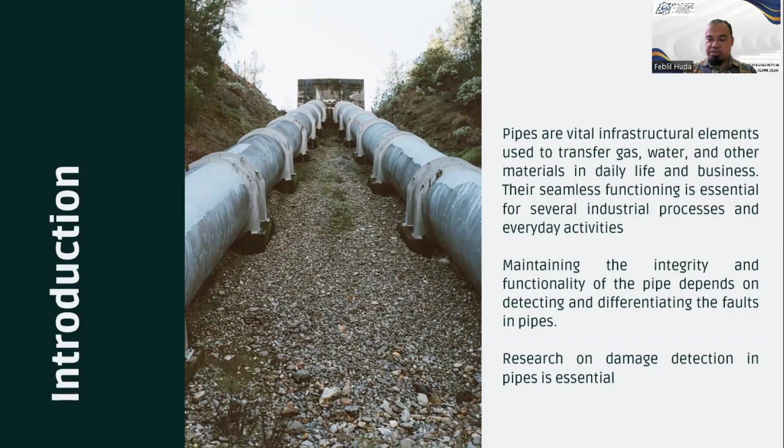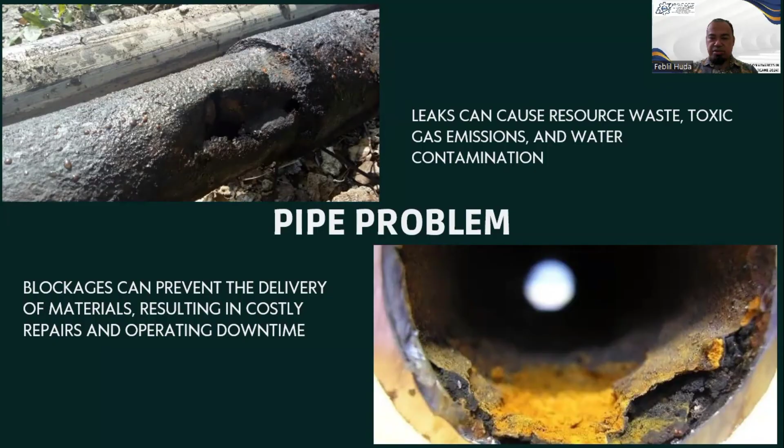There are two types of damage frequently found in pipelines. The first one is leakage and the second one is blockage. Leaks can cause resource waste, toxic gas emission, and water contamination, and blockage can prevent the delivery of materials, resulting in costly repairs and operating downtime. These two types of damage will be investigated in this research.

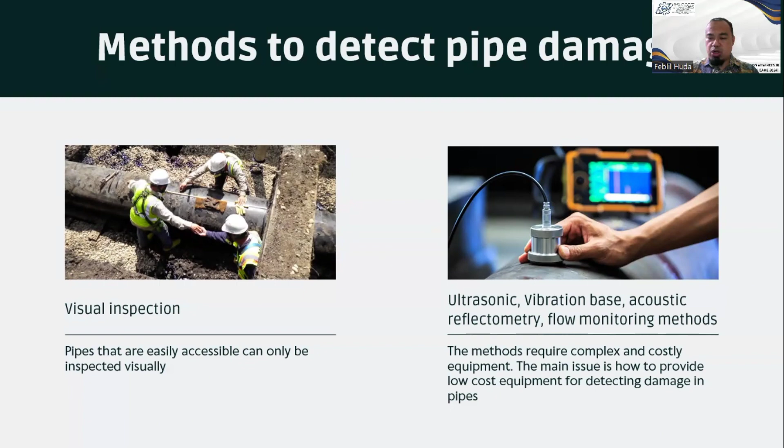Because of the importance of damage detection in pipe, several methods have been investigated. The very basic method is visual inspection, but this method has the weakness that only pipes that are easily accessible can be inspected visually. The other methods are ultrasonic, vibration-based, acoustic reflectometry, and flow monitoring. These methods require complex and costly equipment. So the main issue is how to provide low-cost equipment for detecting damage in pipe.

The sound signal or acoustic reflectometry method presents some benefits for pipeline damage identification. This technique sends acoustic pulses into the pipeline and analyzes the return signal to discover obstructions, leaks, and other irregularities. Real-time monitoring, which enables issue identification and localization without requiring significant excavation or physical access to the entire pipeline, is one of its main advantages.

So in this research, the sound signal or acoustic reflectometry will be used to investigate damage in pipeline. By using a low-cost microphone, we will investigate whether this method can detect the damage in pipeline accurately.

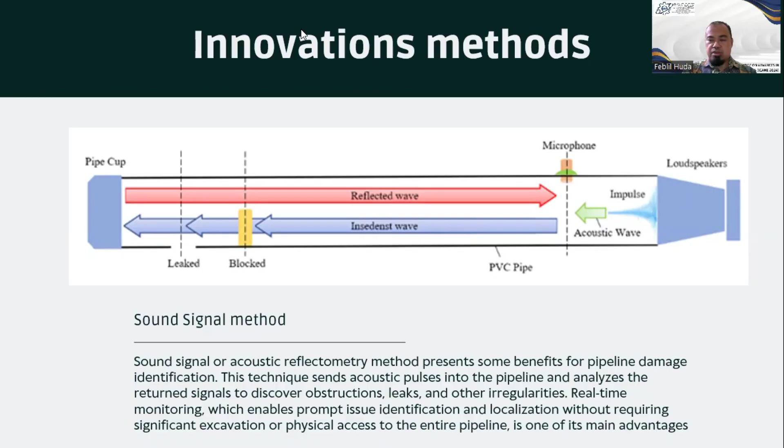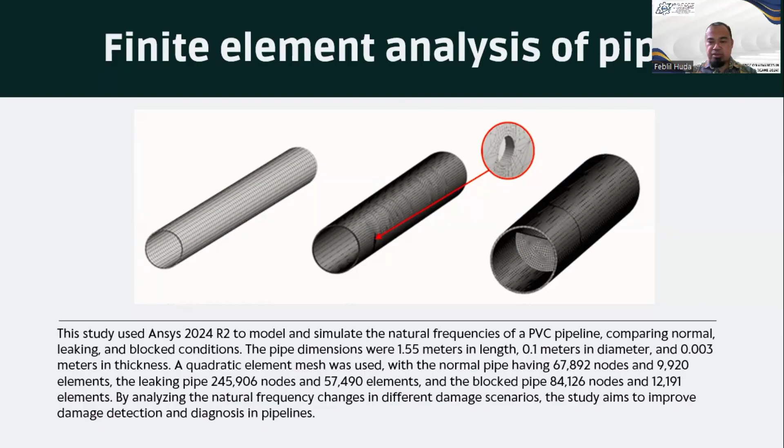The research method. At the first stage, we conduct finite element analysis of pipes. The study used ANSYS 2024 R2 to model and simulate the natural frequencies of a PVC pipeline, comparing normal, leaking, and blocked conditions. And here are some data of the pipe. By analyzing the natural frequency changes in different damage scenarios, we will find the difference between normal, leaking, and blocked conditions. And here is the experimental setup.

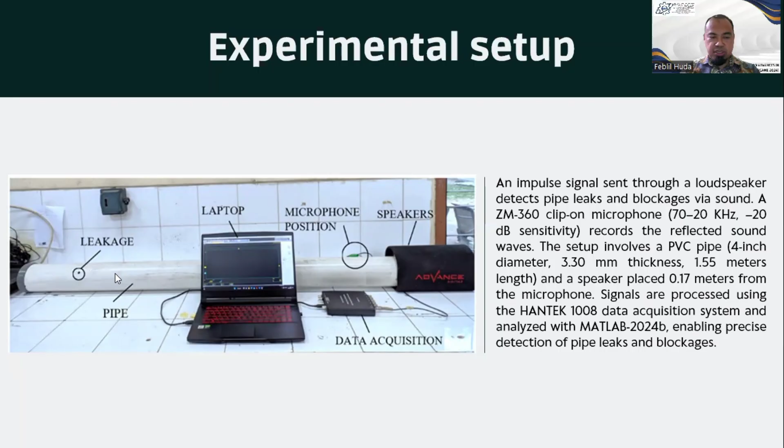The speaker will give an impulse into the pipe, and here is the simple microphone position. We install it in the pipe, then the microphone is connected to data acquisition, and data acquisition is connected to the computer. And we give some leakage and blockage in the pipe. The artificial failure condition is given to the pipe.

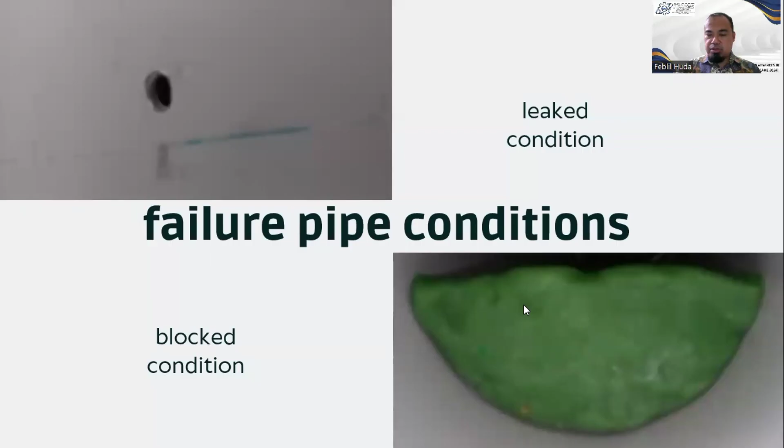The first form of damage in pipe is the leak condition. In leak condition, we make holes at some positions in the pipe, and for the blockage condition, we put some plasticine in the pipe.

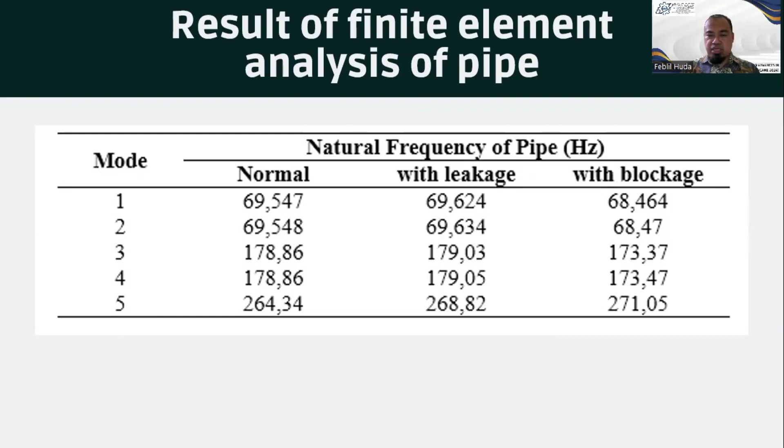Result and discussions. Here is the result of finite element analysis of pipe. We can see here the comparison between natural frequency of pipe between normal and with leakage and blockage, with data from the first mode until the fifth mode. We can see that by giving the leakage, the natural frequency of pipe is changed, and also with the blockage. So the damage will change the dynamic properties of the pipe.

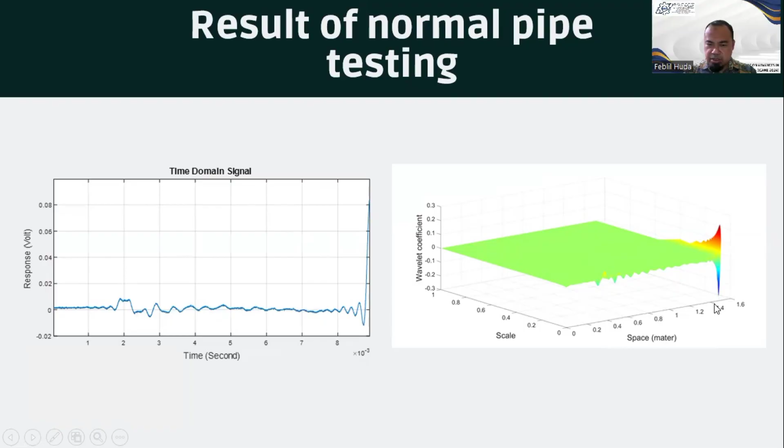At the end of the pipe, this is the cap of the pipe, and this is the result of normal pipe testing. We can see here the time domain signal; position 0 is the position of the microphone, and the end of this data is the position of the cap of the pipe. For normal condition we can see just a little bit of curve here, and when we use wavelet transformation, we can look up to the position. At that position, the wavelet coefficient is higher than the others.

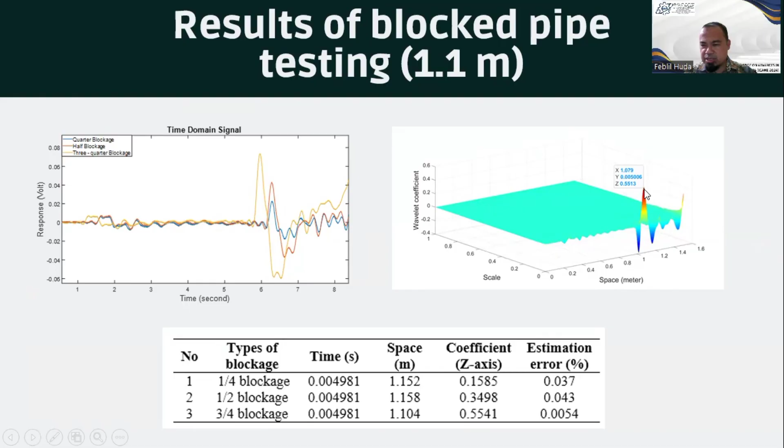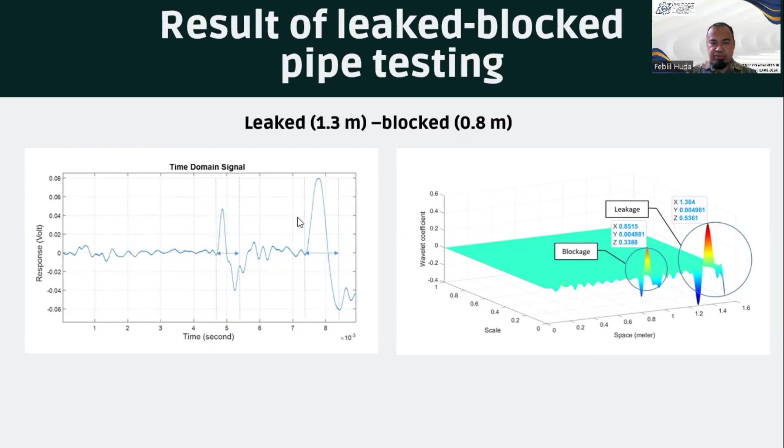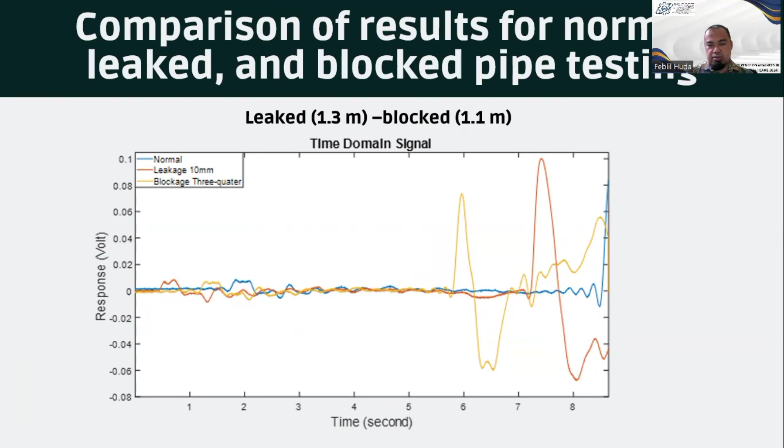And this is the comparison of results for normal, leakage, and blockage pipe testing. The blue color is normal, the red color is leakage, and the yellow is blockage 3/4. So normal does not have many curves, and for the 10 millimeter leakage, the red one, we can see the clear peak here. For the blockage, we can see a peak here, and after the peak, one wave, we can find some high curl, but not in the leakage position. So the difference is after the blockage, we can find some high curl, maybe some impact because of the blockage.

And the conclusions: detecting pipe damage from leaks and blockage using sound signals from a simple microphone has been successful. Tests show that the wavelet characteristics and time domain signal features of normal pipe differ from those with leaks or blockage. Wavelet coefficients increase with larger leakages or blockages, and the wavelength at a leakage point is longer than at a blockage. Detection can also identify combined leaks and blockage.